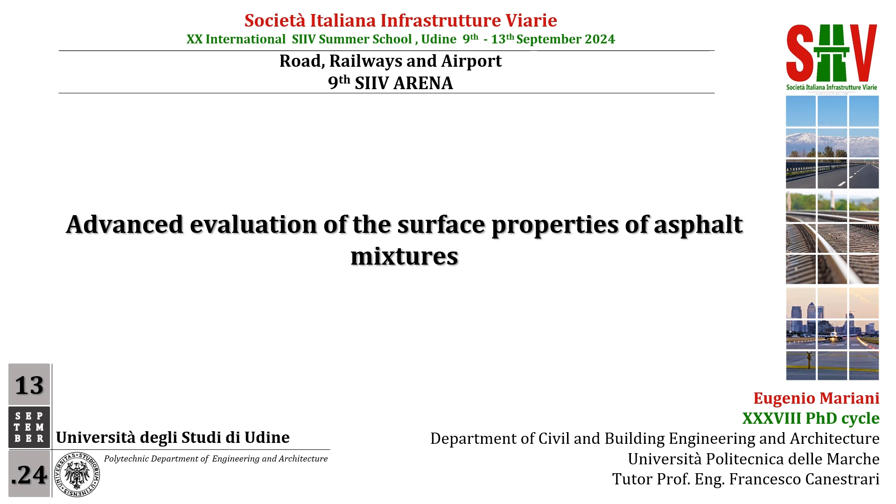Mariani. I am a second year PhD student and I come from the Università Politecnica delle Marche. My tutor is Professor Francesco Canestrari, and today I talk about my research project, the advanced evaluation of the surface properties of asphalt mixtures. The outline: during this presentation, I will talk about the background and objectives, materials and method, results and analysis, and finally the future activities.

In the 1960s, the Wehner-Schulze device was developed in Germany. Many research studies are focused on the correlation between friction after polishing, the FAP, resulting from the Wehner-Schulze device, and polished stone value, PSV, and investigate the polishing of different aggregate types. The main goals of my research are to find a more reliable method to estimate the pavement friction characteristics, find a limit of FAP for the Italian technical specification, and correlate laboratory friction measures with field friction measures.

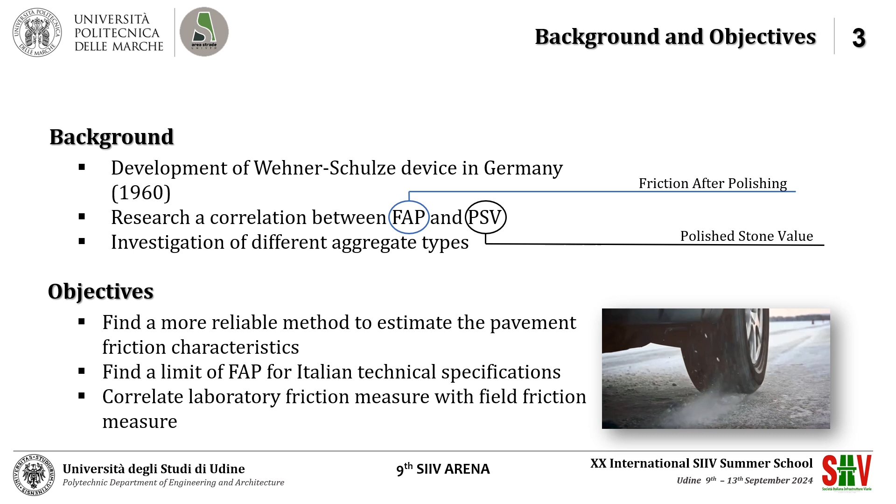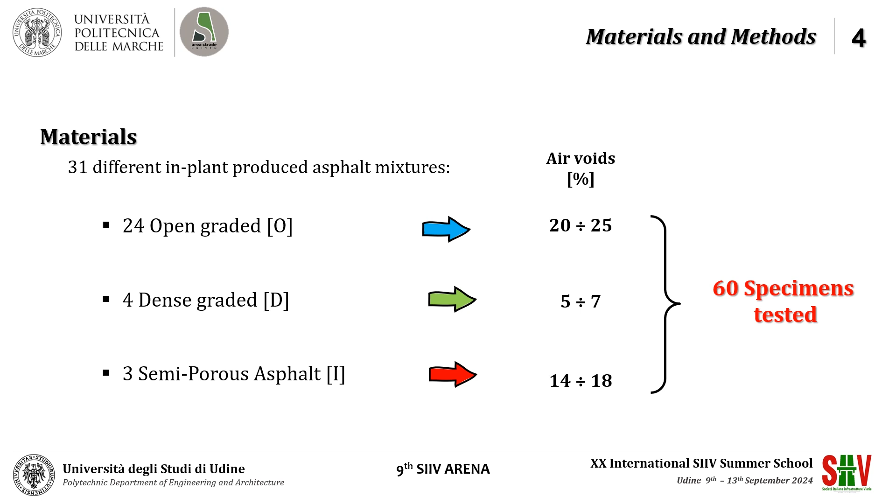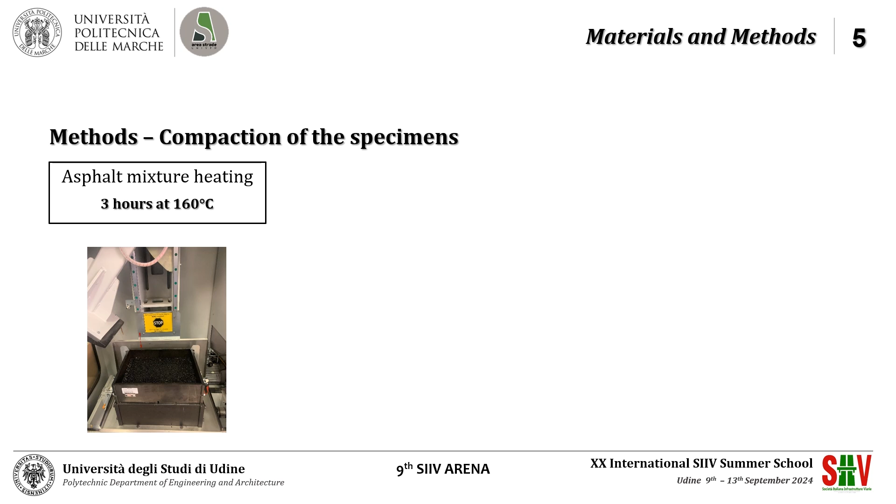A total of 31 in-plant produced asphalt mixtures were investigated, including 24 open graded, 4 dense graded, and 3 semi-porous asphalt, characterized by different void content. A minimum of 2 repetitions were tested for each mixture. To produce the specimens, the asphalt mixtures were heated in an oven at 160 degrees Celsius for 3 hours. The hot asphalt mixtures were then compacted using a roller compactor to produce a rectangular slab 5 cm high. Finally, the slabs were cut in 22.5 cm squares as required for the test.

For some samples, the profile was analyzed using photogrammetry, and 72 photos were taken from each plate. A point cloud was generated by the software, and then the surface was cut with a circular section to generate a surface profile.

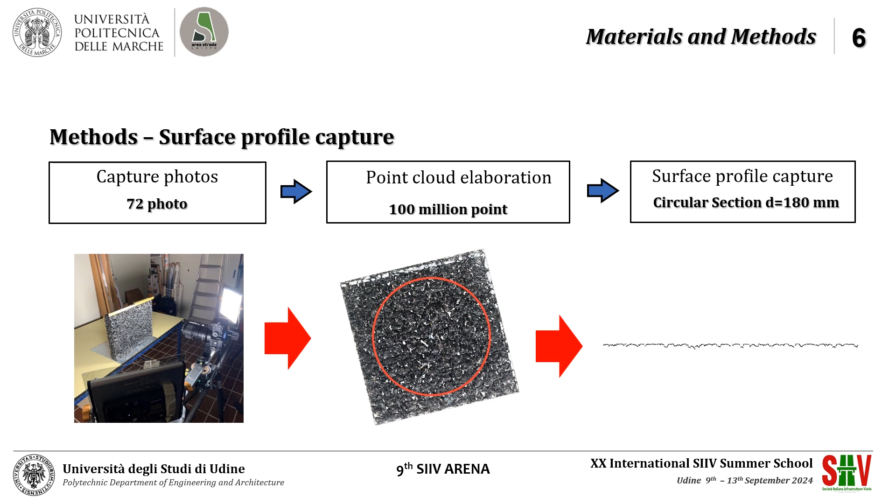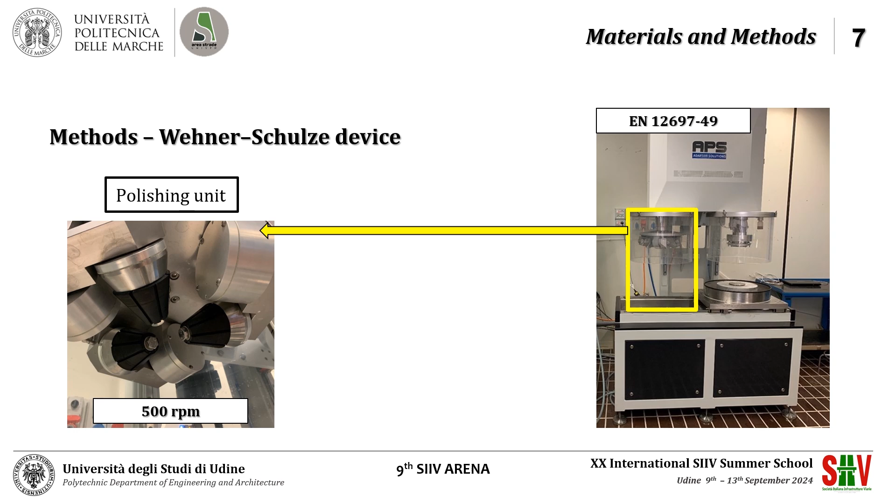What is the Wehner-Schulze? The Wehner-Schulze is a laboratory equipment for the study of pavement friction at different stages of polishing. It is composed of 2 units, the polishing unit, the left part, and the test unit, the right part. The polishing unit simulates the effect of the tire on the pavement surface by means of 3 rubber rollers rotating at 500 rotations per minute and a mixture of water and quartz powder. The test unit measures the coefficient of friction by braking 3 rubber sliders on the surface of the sample, whose initial speed is 100 km/h.

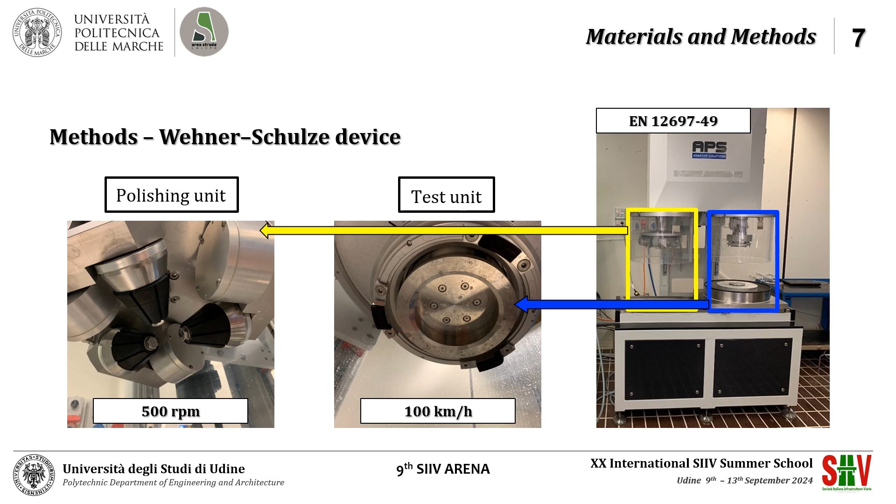Now we can see the output results of the Wehner-Schulze. The first figure shows a single measure of friction. The test data is interpolated by a 6th-order polynomial to find the friction at 60 km/h. F60 is found for each number of passages to draw the second figure, which is the friction curve. The friction decreases as the number of polishing passages grows. The friction after polishing is the average between the 2 last tests.

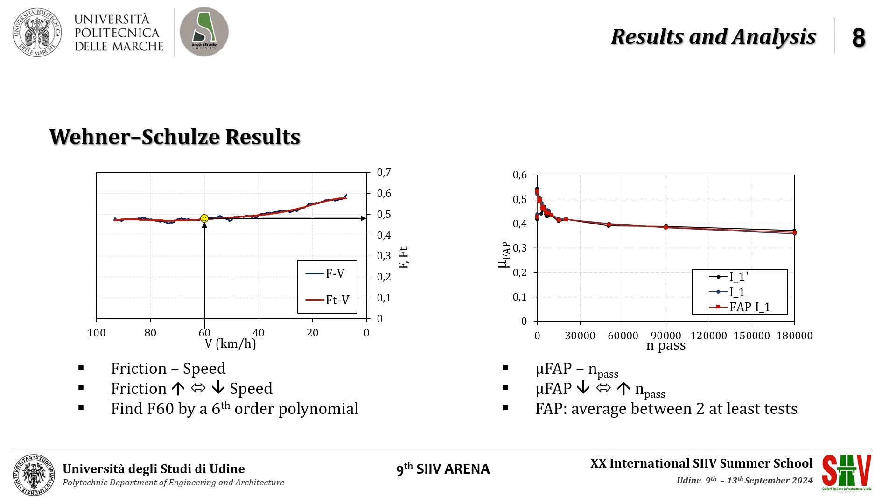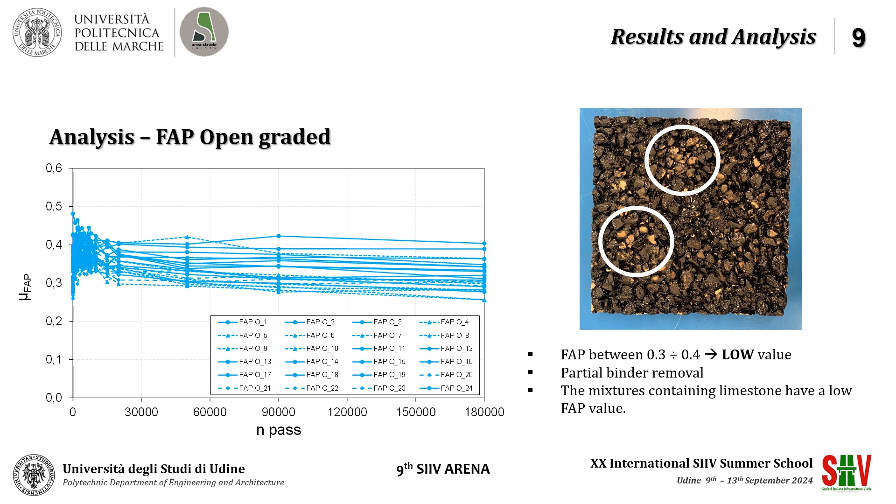The figure shows the open graded results in terms of friction after polishing. We can see that the skid resistance values at 180,000 are between 0.3 and 0.4. Low friction value after polishing at a number of passages equal to 180,000. The bitumen is not removed in most of the specimens. It is possible to see the binder removal marked with the white circle on the sample on the right.

Similar to the previous slide, the figure shows the dense graded results in terms of friction after polishing. We can see how the friction values at 180,000 are relatively high, between 0.4 and 0.5. After polishing at a number of passages equal to 180,000, the bitumen is not removed in most of the specimens, and we can see residual rubber from the roller on the surface. The polishing area is marked in the picture.

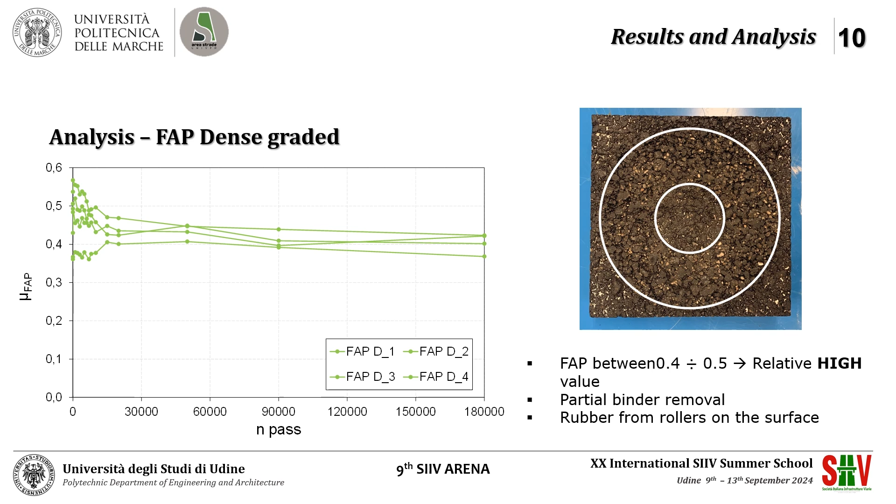Now, in this figure are shown the semi-porous asphalt results in terms of friction after polishing. The performance of this asphalt mixture is positioned between open graded and dense graded. The range of FAP is equal to 0.3–0.4. Only one of the three specimens has a relatively high value. After polishing, like other asphalt mixtures, the bitumen is not removed on the sample, and the polishing area is marked in the picture on the right.

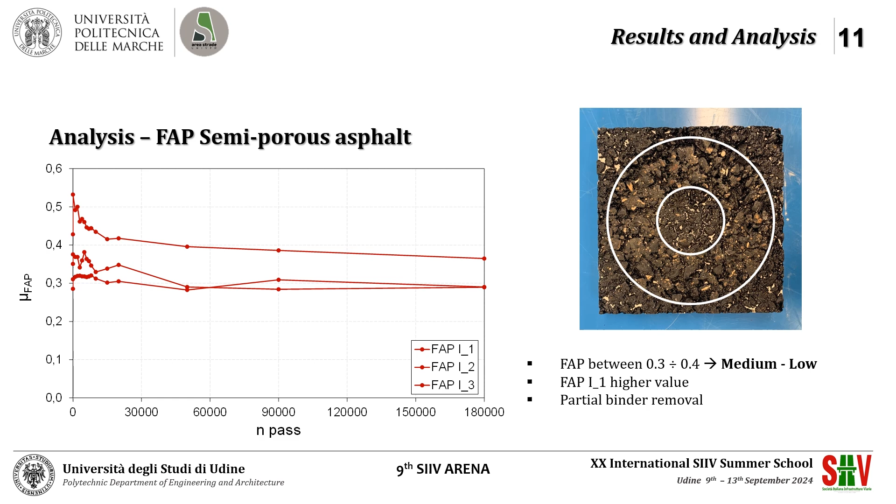In this slide, we observe three types of surface profile, one for each type of asphalt mixture. In order to analyze the contact area from the rubber slider, a deformation ΔZ has been assumed and the contact percentage has been calculated. The ΔZ is shown in the figure in the left part of the profile.

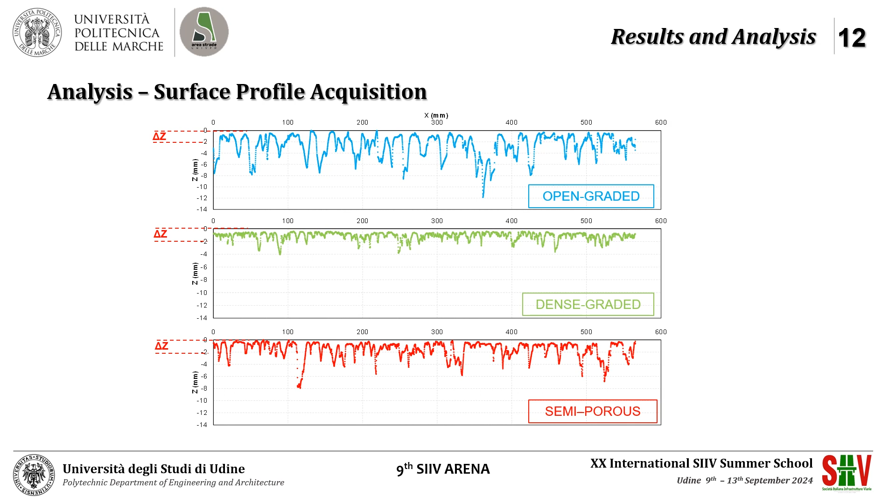In conclusion, the figure shows the comparison of asphalt mixtures: open graded and semi-porous asphalt mixtures show a lower friction value than dense graded, probably due to the reduced contact between the slider and the aggregate. The second figure shows the relationship of skid resistance as a function of percent of contact.

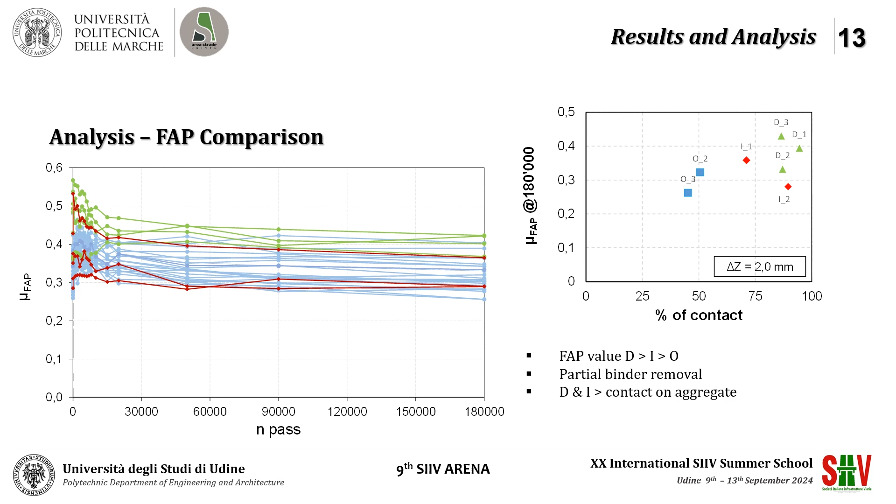I can divide my future activities into classes, work in progress and coming soon. So, in the work in progress, core specimens taken from the pavement have been tested, and I will be looking for a correlation between Wehner-Schulze polishing and traffic polishing, as well as between laboratory and field friction measures, for example, the SCRIM measure. Right now, I'm focused on analyzing the data, a lot of data. In the future, we hope to develop a prediction model for skid resistance.